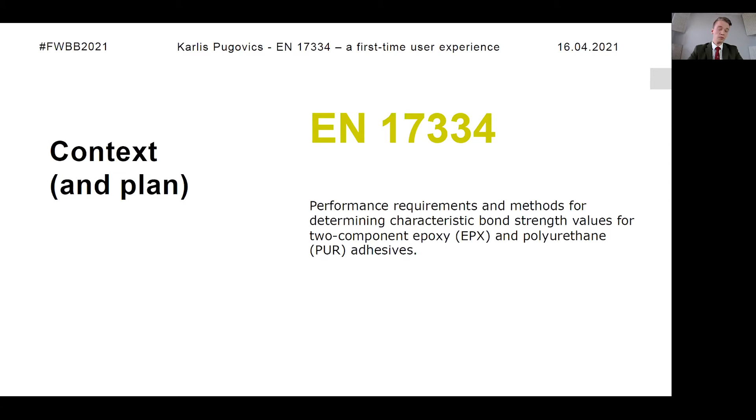So the story is, this new standard, basically what it does, it defines performance requirements and methods for determining whether or not we can use the adhesive and what are the strength characteristics. The basic scheme, as we try to do it, is the following. So you have an adhesive that you choose, you verify it according to testing methods, and then you do the testing of actual samples that are quite similar to those that would be in an actual building. The test methods are quite defined, and after you do this, you have all the data and you can feel confident that you are able to use this adhesive as adhesive for glued-in rods.

So the problem is, what happens if you cannot verify the adhesive you chose? So how this happened for us? So there are four main test methods for epoxy and polyurethane adhesives discussed in this standard: tensile shear test, delamination test, shrinkage stress test, and multiple compression shear test. These are all slightly modified methods from different parts of the EN 302 standard, with a little bit of modifications in terms of glue line thicknesses and other small details, but the basic test method is the same.

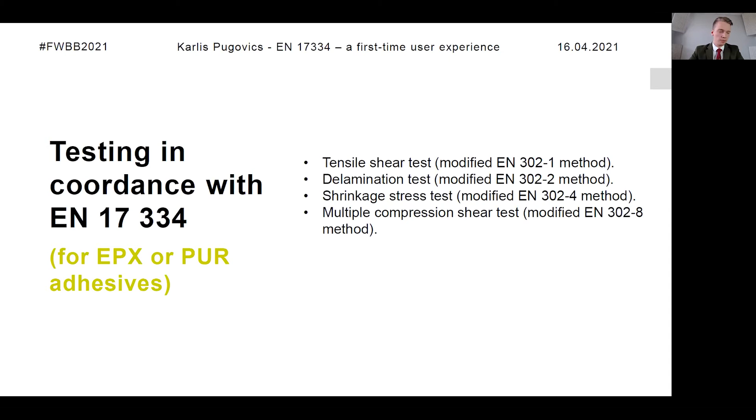So we started with this, which is a test that a lot of us have probably seen. So you have these small samples that are 20 times 150 millimeters in dimensions, and their thickness is dependent on the glue line. So if you have what's called a close contact glue line, which is less than 0.1 millimeters, then you make this test sample out of two pieces of beech that are 5 millimeters thick each. When you do something for thicker glue lines, then the test sample looks something like this. And you have to do these tests before you try and do the actual testing of the real samples per se.

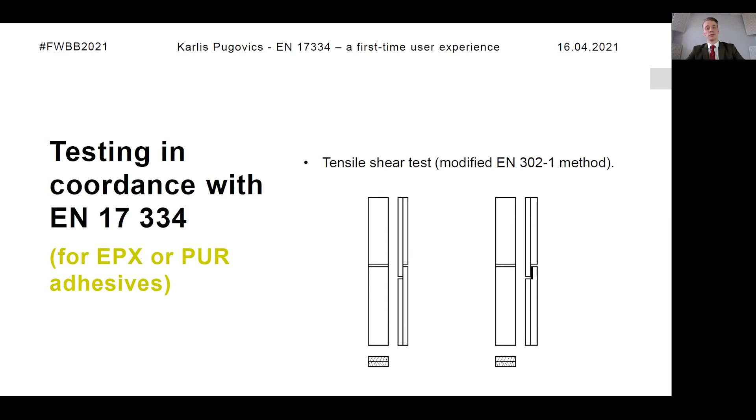So the samples are, of course, made of European beech. For us, the measured average density was 713 kilograms per cubic meter. Average moisture content was 12%. So a slight comment here that according to this standard, you have to take into account the angle of annual rings for these samples. So when you make these samples, as you can see in this picture, you have to obtain what is called the herringbone pattern for the annual rings. So first problem, a small problem, is finding raw material good enough for these tests, but that's not an issue actually. It's just a small thing that you have to take into account.

The adhesive we used was a highly dense, two-component epoxy adhesive. So we used the densest adhesive we could find, for the very simple reason that this adhesive will have to be used at some point in a factory setting, and you will not be able to pour it in when it stands perfectly vertically on your table in the lab. This will be done for large beams that are lying flat on the floor or on a table. So for the sake of doing these joints correctly, you have to take an adhesive that is quite dense, so it doesn't pour out that much from the joints when you do the manufacturing process of these joints in a factory setting.

So the testing for the, we all know the glue tests. So the manufacture of them, as you can see here, this is the epoxy that we used. It's quite dense. And you make the thick glue lines with grooves that you fill in with the adhesive as you go. And the thing is that these samples, according to the testing method, have to be made with a pressureless gluing. So you cannot apply pressure as you would normally do when you are gluing something.

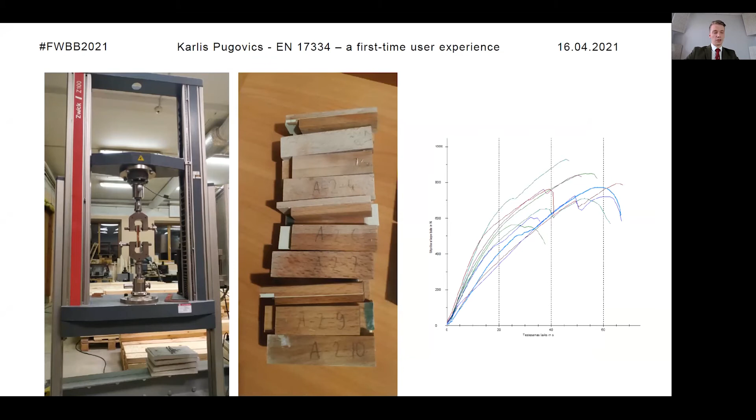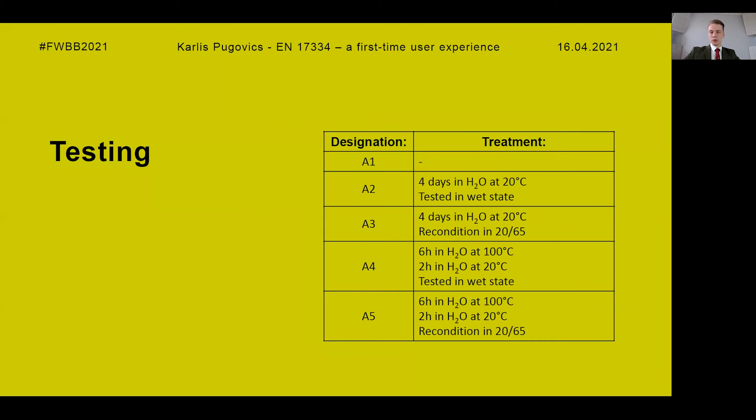So the first series, there's no treatment at all, just conditioning in climate chamber, 20/65 climate. The second series rests 4 days in water that's 20 degrees Celsius, and you test them in wet state. A3, you also soak it in the water for 4 days, and then you recondition it to original mass. Fourth and fifth, you boil it, then you put it in cold water. Either you test it in a wet state, or you recondition it to the original mass in 20/65 climate. This is quite straightforward, though it does produce quite a lot of samples.

So you have 5 groups of samples. Each of these, you have to provide at least 10 valid results when you test. And also you're testing multiple thicknesses of adhesive lines. So you have close contact adhesive line, which, as I said before, is less than 0.1 millimeters. You have a glue line thickness of 1 millimeter. You have glue line thickness of 2 millimeters. So for each series, you're preparing at least 30 samples, which sums up to quite a large amount of samples that have to be tested.

So testing was done on a universal testing machine. The loading rate, according to the standard, can be up to 5 millimeters per minute. You have a time limit during which you have to achieve failure. We achieved failure for most of our samples in around 80 seconds, and we loaded it with 2 millimeters per minute loading rate. So that provided us with the best results.

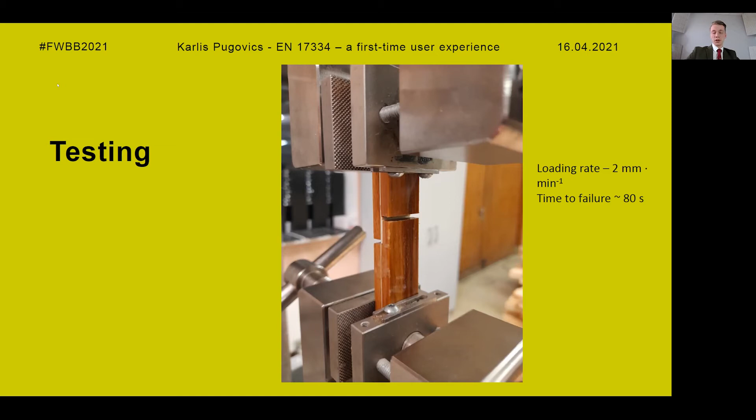And speaking of results, this is the part when we start seeing that something wasn't right. In bold, you'll see the average values of the samples we tested. In the brackets, you see the force that they had to withstand. It's in newtons per square millimeter. So the point of this test is that you have these series, these sample populations, you have to break them, and it's a pass-fail principle. So you have to pass a certain strength parameter in order to be sure that this adhesive is

adequate for our application. So for the non-treated series for close contact glue line, we had to achieve 10 newtons per square millimeter. We achieved 8.7. For 1 millimeter, we had to achieve 8.0. We achieved 7.2, and the list goes on and on. So basic thought is we weren't able to get the results we needed.

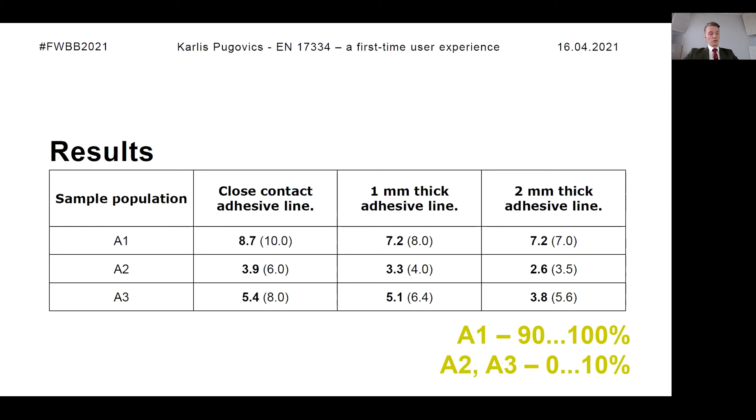Also, you have to check the amount of wood failure, in terms of the percentage of how much wood is left at the failure zone. So for the first sample group that didn't have any treatment other than conditioning, this was 90 to 100%. But for all the groups that had some sort of water treatment, this was basically 0. For some, there was a small amount of wood left on, but basically they all failed on the adhesive line. So this started to give us some sort of clue of what might be happening. So what did happen?

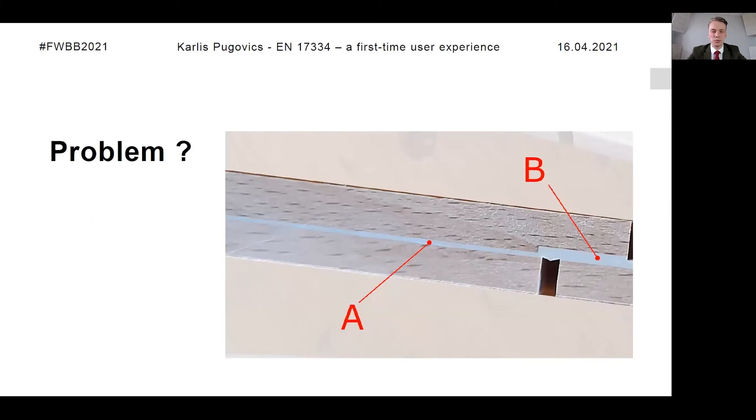According to the testing methods, this was a sample for a 2 millimeter glue line, so this bit here should have been 2 millimeters thick. In reality, we measured it afterwards, and the average thicknesses ranged between 2.5 and 3.0 millimeters. And in here, where there shouldn't be any visible glue line at all, we still had 0.5, 0.8 millimeters of adhesive.

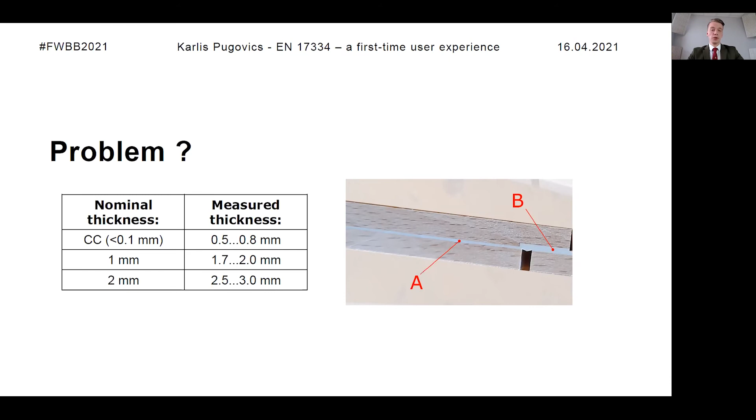This was due to the fact that we were doing pressureless gluing, and we had a very, very dense adhesive. So we weren't able to obtain the samples that we needed to. And this is where the paper you'll see in the conference materials ends. Unfortunately, we weren't able to put all the results in, I'm sorry, but today I'll tell you what happened afterwards for those of us who are here.

What we did, we repeated the tests with one slight change in the production process. During the production of samples, we did press them. We constructed the frame and we defined the thickness at which the pressure plates rest when they are pressing. This was basically just to squeeze the excess glue out of the samples, so we would get the samples we needed in order to do the tests. They weren't pressed too hard, just enough so the excess glue pours out.

And so the results were slightly better. However, although this adhesive was certified, all the papers were there, everything should have been great, we still did not achieve the results. And that gives us the question of why, in terms of conclusions.

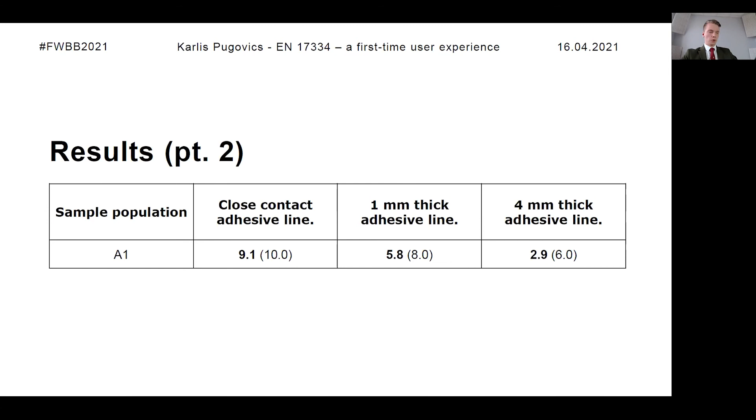In literature and from a logical point of view, in a manufacturing environment you would want to use an adhesive that is dense because it's easier, and for factory workers that will actually be doing these joints, it is much easier to work with. We're not thinking about lab technicians here, we're thinking about workers. But we see that we have a problem with these dense adhesives. They do not perform in the way they should.

So even with pressing, even with obtaining the perfect samples, we didn't achieve the results we needed to. And that is due to the fact that a dense adhesive cannot provide sufficient adhesion to the wood to withstand the pressure. With a very dense, very hard adhesive, some of the samples actually broke when they were just put in the machine without any load at all.

So further testing is currently being done. We're looking into this, of course, but the first conclusion from our side is that we should look into how we can maybe adjust these testing methods a little more so they are more appropriate for denser adhesives, and then we can see what happens. This is currently being done. The results should be in in a couple of weeks' time, but of course the conference is today.